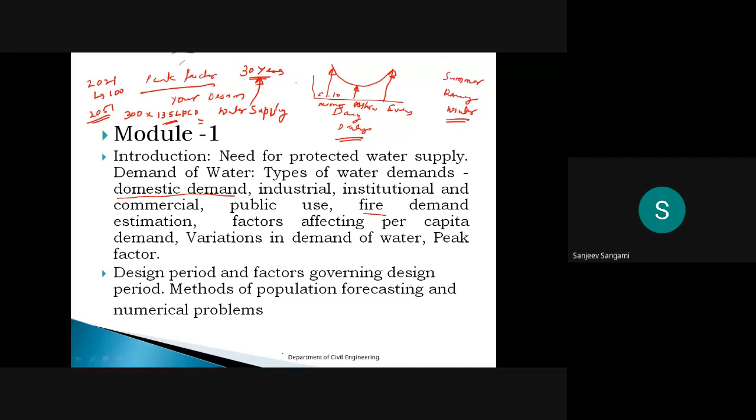For example, if each person requires 135, then multiply that demand by some peak factor. We always keep some extra demand for fluctuations, for example fire demand calculations, or if you are consuming 135, sometimes you may consume extra. Variations in demand have to be considered. We'll see how exactly the peak factor is considered and what factors affect it. Then the design period, as I already discussed, is 30 years. Some numerical problems we are also going to discuss in this first module.

The second module is completely related to water treatment. Here we are going to discuss the water treatment units: screening is the first one, then sedimentation, then filtration, then disinfection. These are the major units we are going to discuss in this module. The intake structure, as I already said, is the inlet from the source. For example, if a river is flowing in this direction, the intake structure will be constructed here. Normally, this intake structure is a jack well, which we will discuss in further classes.

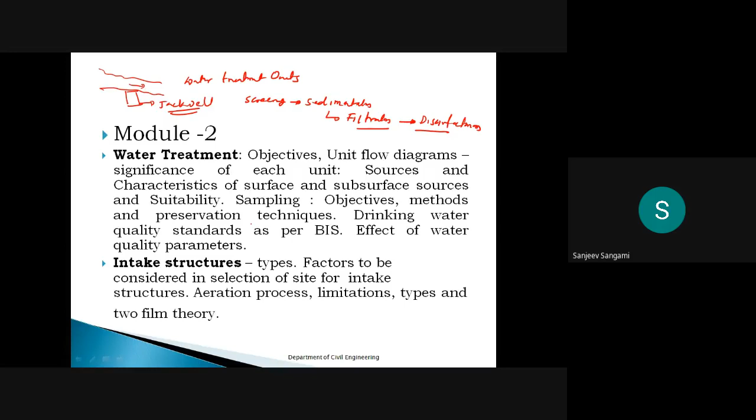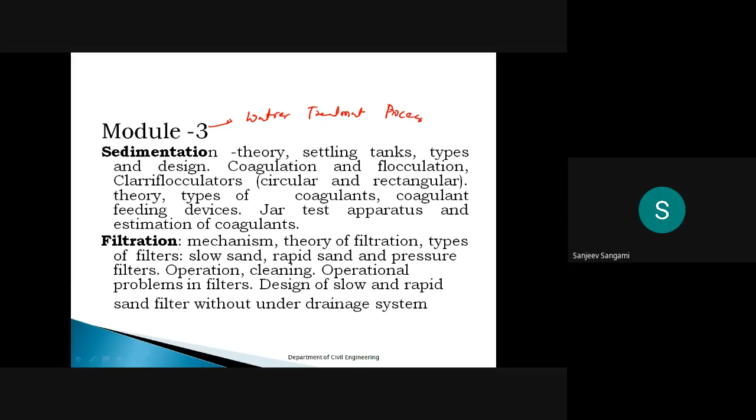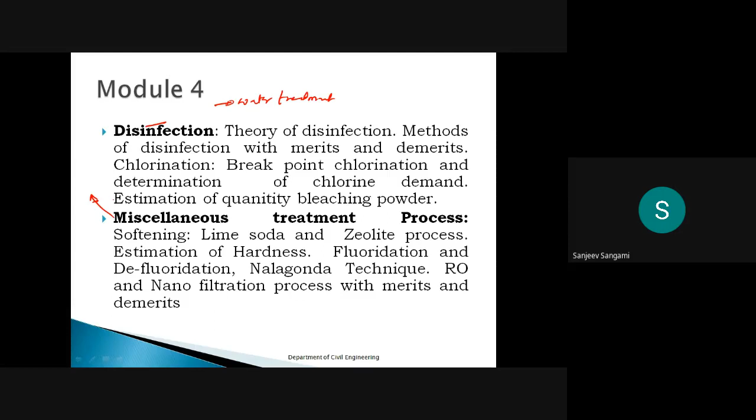Then in module 3, we are going to discuss sedimentation: the theory, settling tanks, types, design, and coagulation cum flocculation. We'll discuss it in detail. It is also completely related to the water treatment process. The fourth module is also related to water treatment. Here we are going to discuss disinfection and some miscellaneous special treatments like the lime soda and zeolite processes.

The fifth module is completely related to the distribution system. So normally the first module is the introduction part, and the second, third and fourth are related to water treatment.

And the fifth module is related to the distribution system. So here we are going to discuss the complete design of the water supply distribution network, then how the pressure is maintained. As I already said, the minimum pressure that has to be maintained is 7 meter for the first storey building.

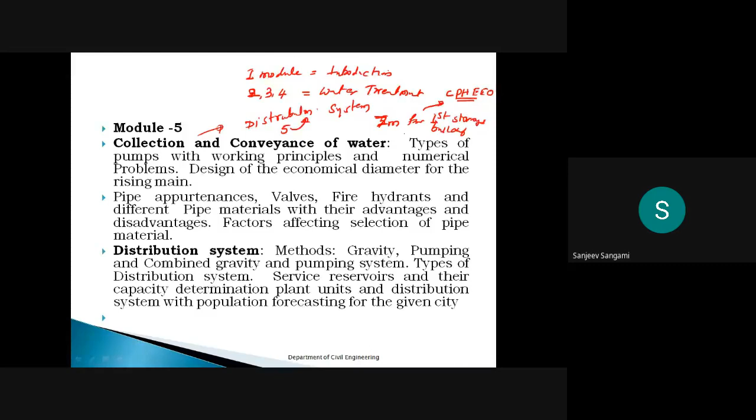So according to the CPHEO norms, 7 meter pressure has to be maintained for the first storey building. That is the main objective of the distribution network. Then the course outcomes: we should be able to design proper treatment units for water treatment. Then we should be able to design a proper supply distribution network. That is the main outcome if you study this course.

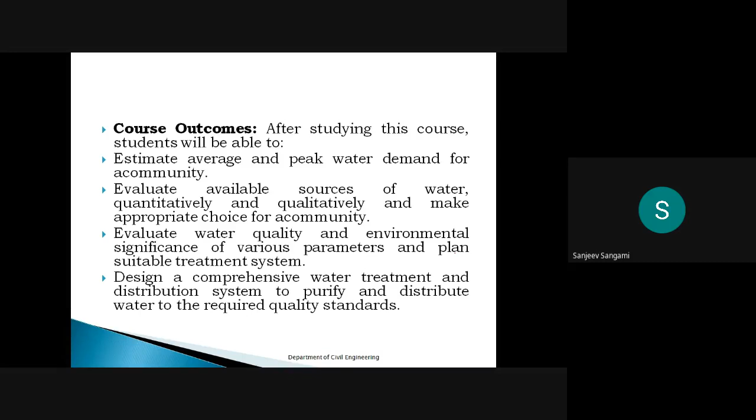Then you have different textbooks available. Peavy and Rowe, that's a very good book. Many people will use that. Then SK Garg, you can give the third priority for this book. You can give the first priority for Peavy and Rowe, and the second priority you can give to BC Punmia. This is also a very good book. And some of the reference manuals, the CPHEO manual, normally we'll use it. The 1999 CPHEO manual is available on the website also.

If you go to cpheo.gov.in, normally you will get this manual. Not only this, you will get the Sewer manual also, and Hammer and Hammer. This is also a very good book. You can take these as reference books. But you can refer these two.

The first one, Peavy and Rowe, and second one, for those who are preparing for examinations like GATE, IES, and some of the competitive examinations by some of the central authorities, you can refer this Peavy and Rowe. It is a very good book, and many IIT and NIT professors will use this textbook.

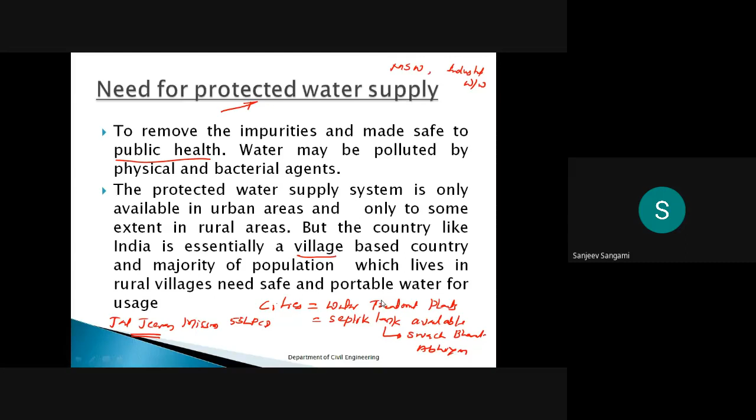So then this is the second objective, and most of the rural population, if not provided with protected water supply systems, are mostly dependent on some of the conventional resources like wells. Then ponds will be there, then streams will be there, or sometimes they will use borewells. Many of the villages are supplying from borewells. And nowadays, some of the

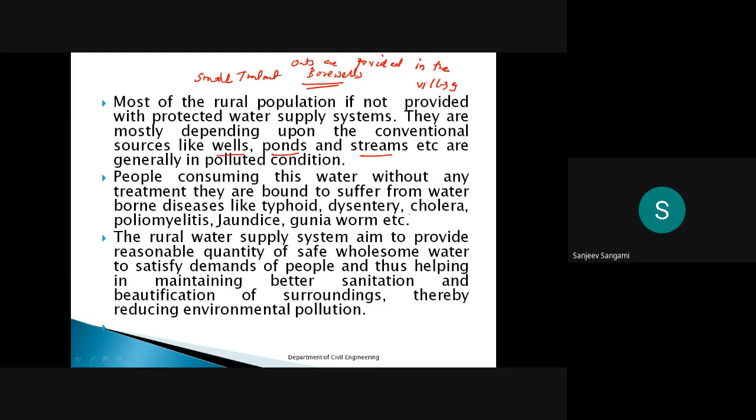So if you are not providing the protected water supply scheme, these are some of the diseases that are going to come. And rural water supply systems aim to provide a reasonable quantity of safe, wholesome water to satisfy the demands of the people, thus helping in maintaining better sanitation and beautification of surroundings, thereby reducing environmental pollution. So the overall need for this protected water supply system is accountability for human health; that is the basis for the water supply scheme.

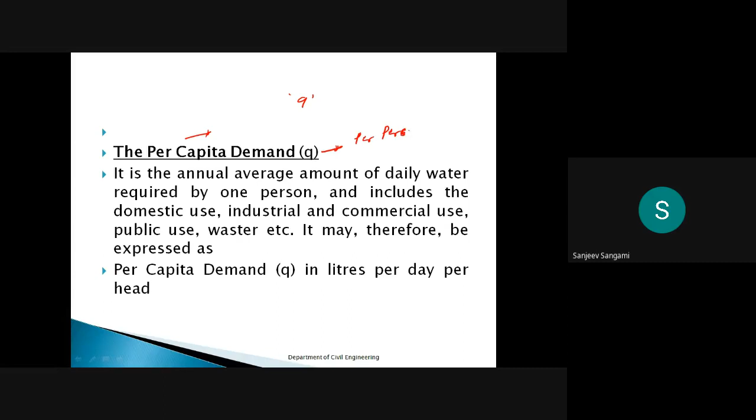So next, we'll go ahead with the per capita demand. Per capita demand is denoted by small q. Per capita demand is very simple: per person, how much water is required. Previously I discussed that in the Jal Jeevan Mission, they are providing 55 LPCD. Means what? 55 liters per capita per day. Capita stands for person. So it means per person, how much water is required.

So then, per capita demand is not only for human beings; various demands are also calculated, like industrial demand and commercial use. For example, if the person is there in the house, how much he is consuming, that is per capita in houses. Suppose the same person is going to the offices, then how much he requires, that is also per capita demand. Even if he is there in the house, what will be the demand?

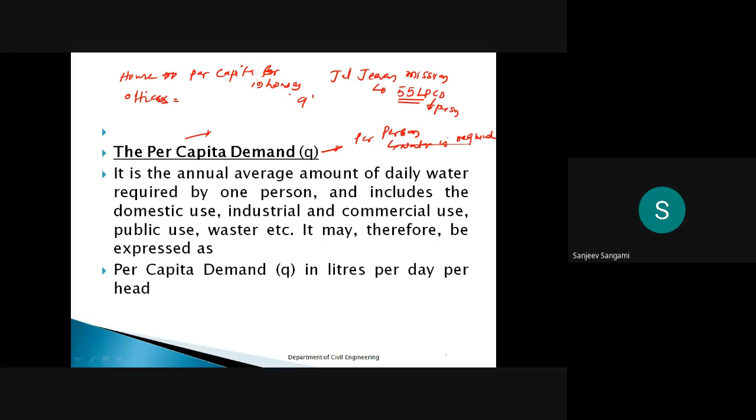Suppose he is there in the industry, what will be the demand? If he is doing some commercial activity, what will be the demand? So like that, various demands will be there. We'll discuss that also. So that is per capita demand, in liters per day per head or per capita.

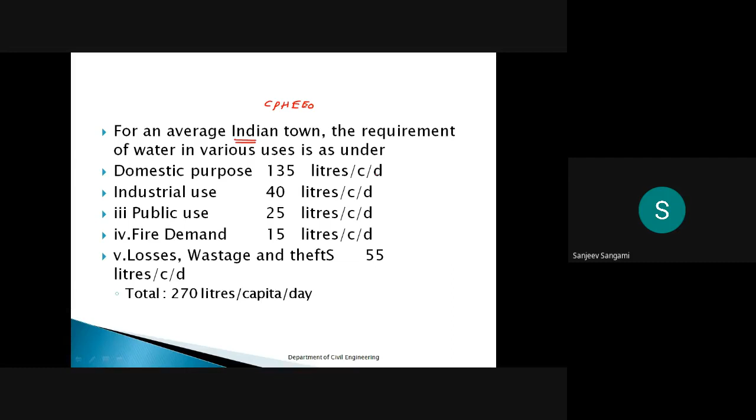So for domestic purposes in an average Indian town, as per the CPHEEO norms manual. CPHEEO stands for Central Public Health and Environmental Engineering Organisation. What it says is that for an average Indian town, the requirement of water for domestic use is 135 liters per capita per day, normally called LPCD. Then industrial use 40. Then public use, fire demand, and any losses or thefts, it will be 55 liters per day.

So for example, how they will consider the industrial use, the public use, the fire demands. The per capita demand means how much the persons are demanding. That is the overall conclusion. So the total will be 270 liters per capita per day. This is the overall demand for an average Indian town.

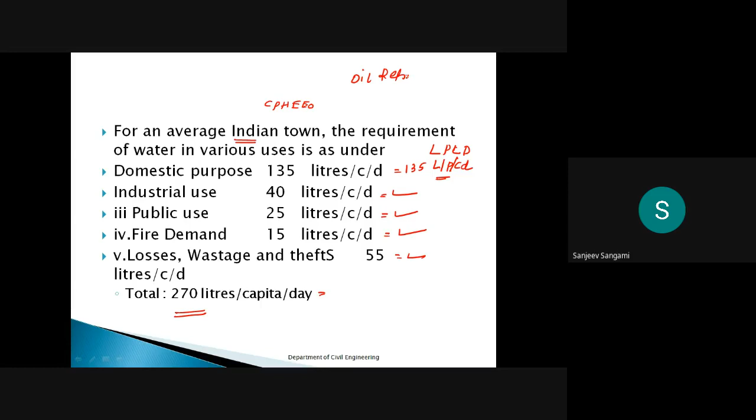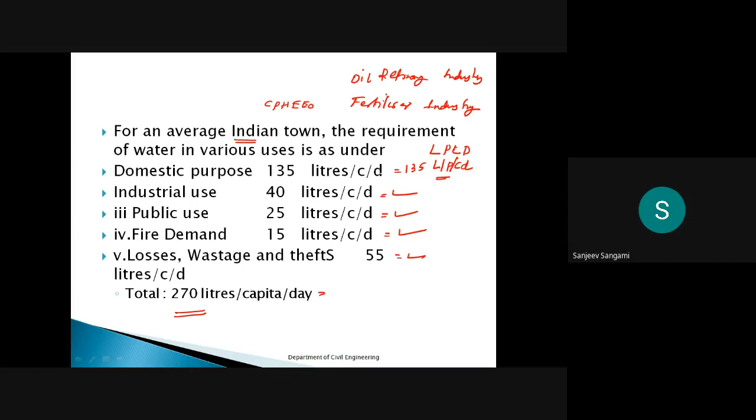Again, there are many clauses. How to take it if you go to specific industries, because for each specific industry, for example an oil refinery industry, how can it be considered? For example, the fertilizer industry, what will be the demand? How can it be considered? That we have to see. So overall, per capita demand means per person how much water is required. That we have to concentrate on.

Then the factors affecting the per capita demand. How it has to be considered? So normally the first factor which is going to affect is size of the city. The per capita demand for the big cities is generally large because, as I already said, they have a lot of flushing type of systems. If you go to any of the latrines, there you have flushing type of systems, which consume a lot more water than normal Indian type of systems.

Then again, the consumption will be very high compared to the smaller towns. This is because in big cities, a huge quantity of water is required to maintain a clean and healthy environment. So if you compare the small towns and the big cities, normally it will be more than 200 liters per capita per day. Now the norms have changed: 200 liters per capita per day in big cities, and in small towns it is 135 LPCD. That we have to always consider.

Then, for example, big cities are generally sewered, and such cities require a large quantity of water. A sewered house's quantity is 4 times the water required for the unsewered. If the sewer is connected, then we will see how exactly it can be calculated, how it will be 4 times, how it will be 3 times in the big cities. That we will consider in detail.

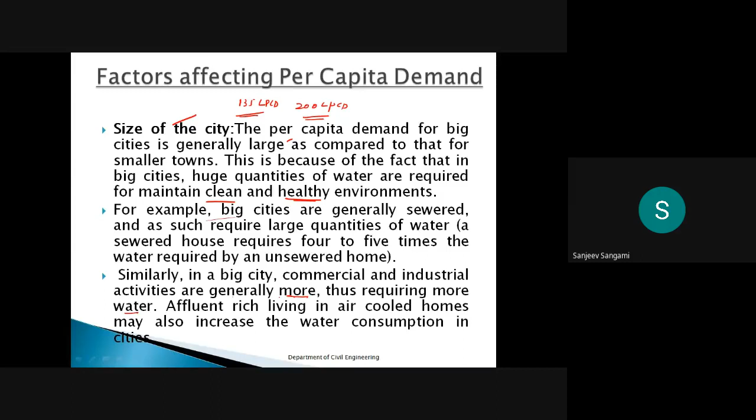Then climatic conditions: in most of the hot areas like Mangalore, Bangalore and some cities like Bombay, it requires a lot of water. Wherever the humid regions are, there will be a lot of water requirement. Then even in Rajasthan and some of the states, a lot of water will be required to satisfy the hot and dry conditions.

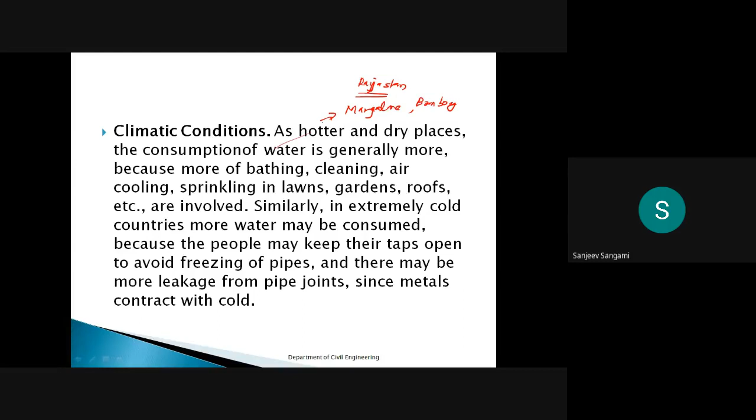So a lot of bathing is also required, cleaning, air coolers. Air coolers also require a lot of water, sprinkling in lawns, gardens, roofs. That has to be considered. So the climatic conditions are also a very important factor that is going to affect.

Then the type of luxury that is used and the habits of the people, even the culture, what they are adopting in their houses, that also affects most of the per capita demand. The rich and upper class communities generally consume more water due to their living standards. Swimming pools will be there, like geysers they will use. So if you go in detail about that, you'll come to know.

Of course, the industrial and commercial activities are also going to affect the per capita demand. The presence of industrial and commercial activities at a particular place increases the water consumption. I already explained some of the industries, like the oil refinery industry, which requires a lot of water. Even the coal-based industries, very important, require a lot of water, because power is what we are getting from the coal-based industry, that is coal-based thermal power plants.

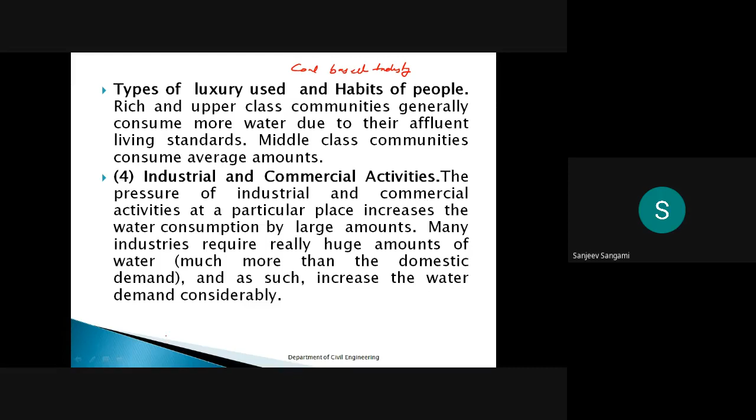The coal-based thermal power plants require a lot of water for their cooling purpose. All these things we have to consider. Even the nuclear power plants require a lot of water for the cooling purpose. So wherever there are industrial activities and commercial activities, a lot of water consumption is required.

Then quality of water supply also. How is this quality of water supply going to affect? For example, if you are giving pure water, the wastage will be very less. If you are giving impure water, most of the time the wastage is very, very high. All these things we have to consider.

So if the quality and the taste of the supplied water is good, it will be consumed more, because in that case the people will not use other sources such as private wells. The pressure in the distribution system is also very important. The remaining things we'll discuss in the next class.